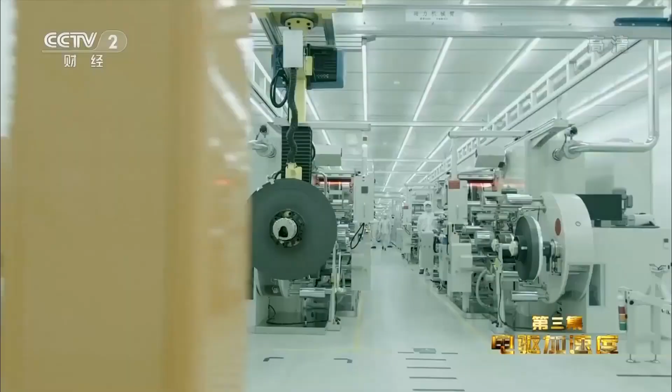Ningde in Fujian province is the world's largest electric car battery production base. A quarter of the world's electric vehicle batteries are produced here. An average of 1,000 batteries are rolled off the production line every minute.

Wang Shengwei is an electric vehicle power battery engineer. He and his team have been working towards a goal to increase the energy density of the battery. This is a key in determining the drive range of an electric vehicle.

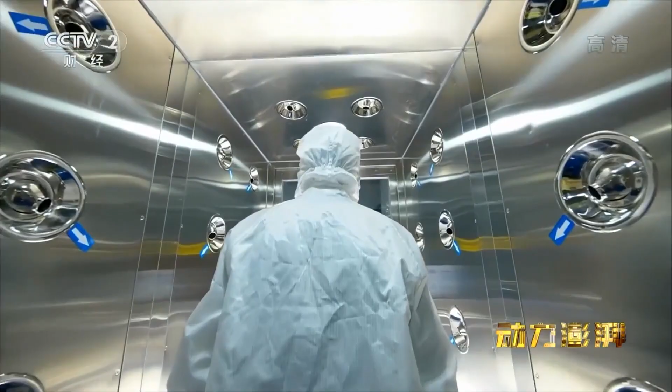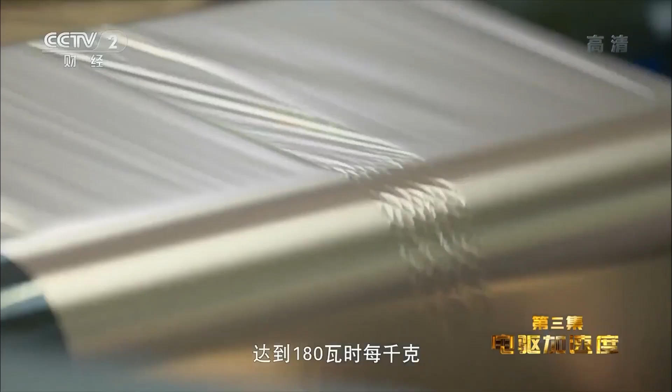In the past 10 years, Wang Shengwei's team has tripled the density of battery packs by developing chemical materials, reaching up to 180 watt-hour per kilogram, increasing the cruising range of electric cars from less than 200 kilometers to more than 700 kilometers. This is close to the limit of battery energy density without a major technological breakthrough in chemical materials.

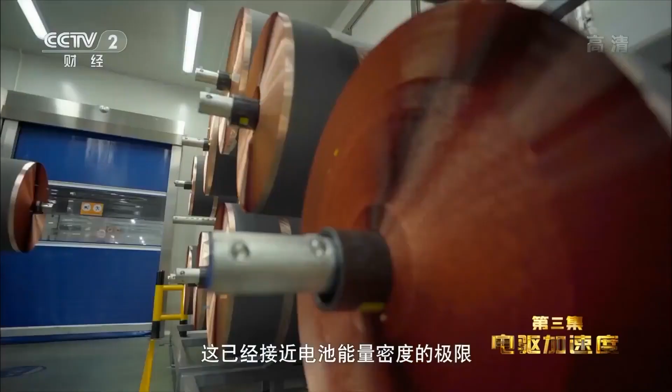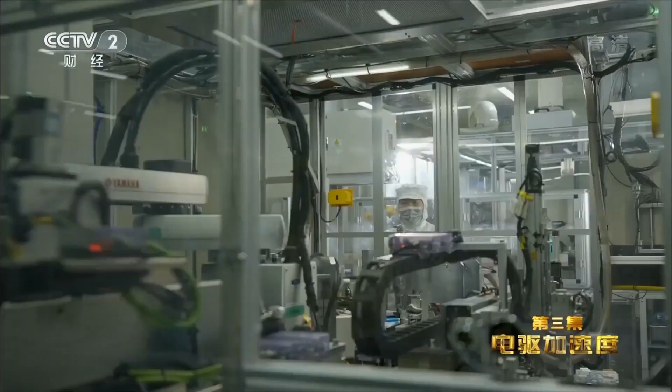However, Wang Shengwei's team did not stop here. This time they tried to break through structurally in design. Ordinary battery packs consist of modules. Each module contains about 10 cells. Wang Shengwei's plan is to remove the module structure and directly integrate the cells into the battery pack. The same battery pack space can fit more cells. As a result, the energy density can be increased by another 20%.

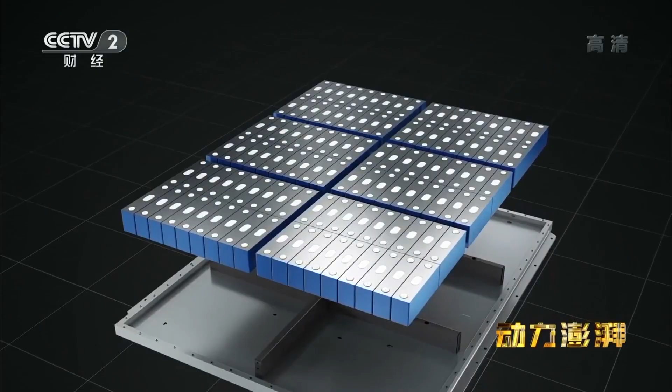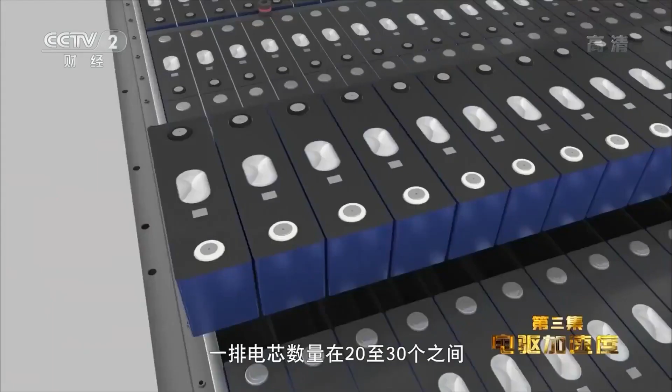However, there are more than 100 layers inside each cell. If the thickness deviation of each layer is 1 micron, the average thickness deviation of the cell will exceed 0.1 millimeters. If the number of cells in a row is between 20 and 30, there will be a cumulative deviation of 2 to 3 millimeters. This will prevent the battery pack from being assembled. Such structural changes impose an extremely high requirement on the consistency of the cells.

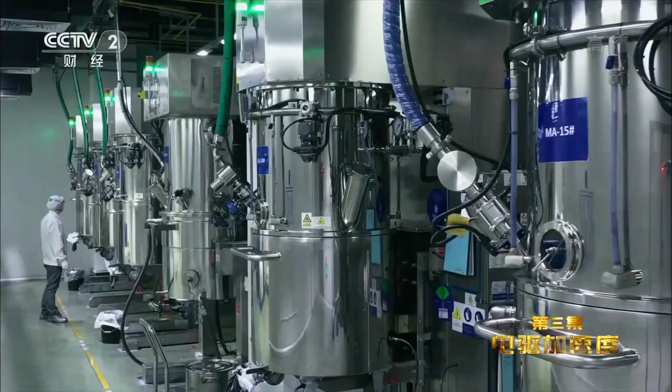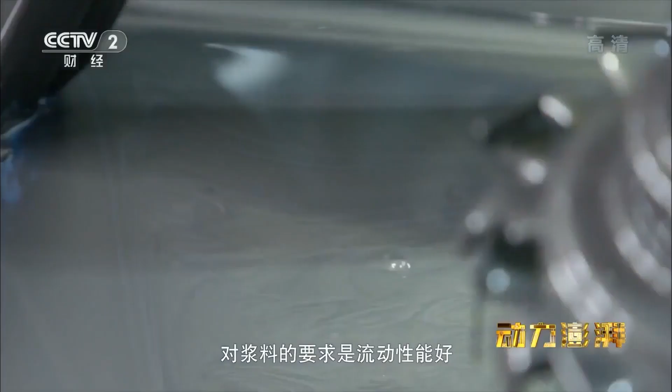When mass production products are near to being delivered, due to large amounts of cells, it is quite difficult to achieve a very good control on consistency of cell layer error. The key to controlling battery consistency lies in these slurries. Slurry is a paste that carries the positive and negative electrode materials of the cell. The requirements for the slurry are good flow performance, stable viscosity, and no solid sedimentation.

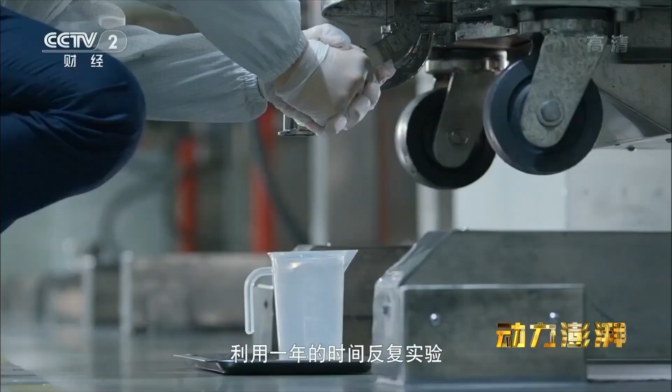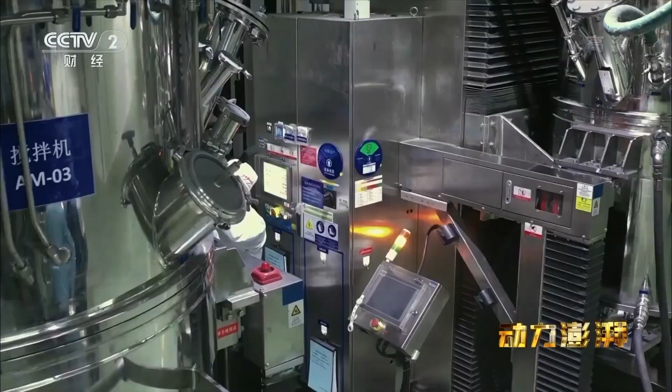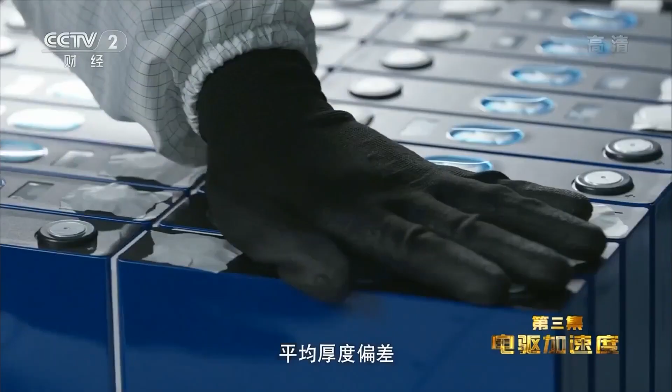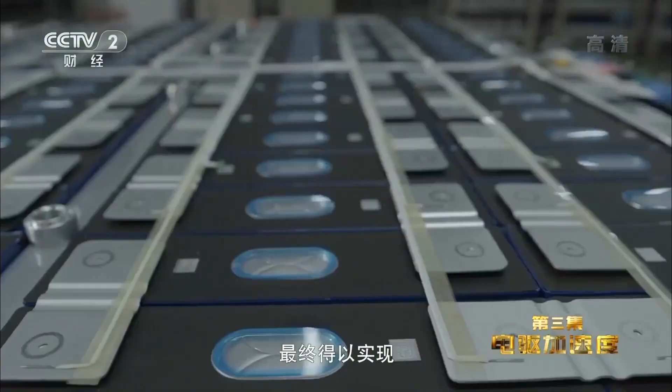Finally, they achieved a standard of overall quality improvement. The idea of directly integrating the cells into the battery pack was finally accomplished. The battery energy density is increased to 220 watt-hours per kilogram, which will increase the cruising range of electric vehicles to more than 1,000 kilometers. For Wang Shengwei, achieving this goal is far from enough.

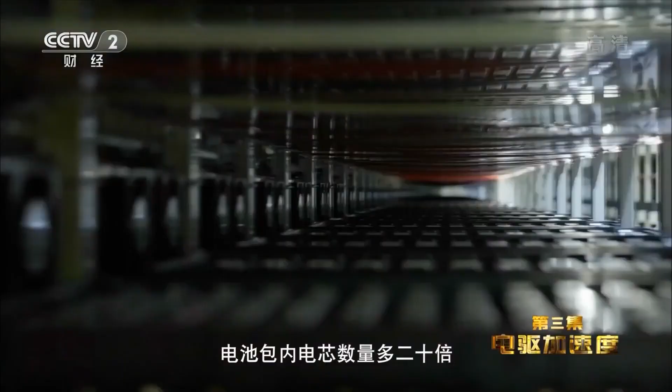15 years ago, he had researched and developed mobile phone batteries, which created a legend of 5-minute fast charging that lasted the phone for 2 hours talking. 5 years later, he changed his career to electric vehicle battery development, and he hopes to bring the convenience of fast charging to electric vehicle users. However, a single electric vehicle power battery is 10 times larger than a mobile phone battery and has 3 times longer life. There are 20 times more cells in the battery pack. Technical challenges are even greater.

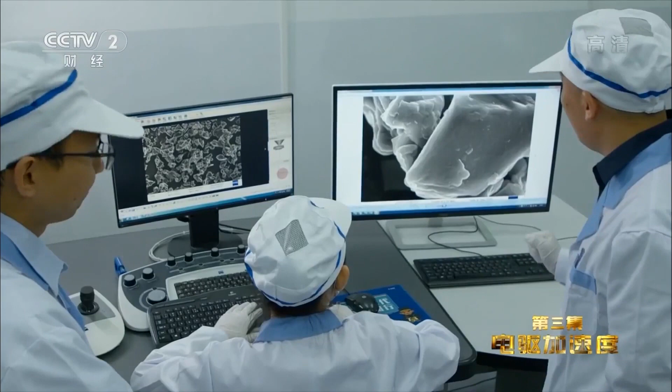From the user's point of view, people hope that the charging of a car can be just as quick as filling up a gas tank. This is ideal. Our current first step is to achieve a 15-minute fast charging. The team led by Wang Shengwei is racing against time. The super idea of fast charging depends on whether they can make improvements to the material structure that will speed up the lithium ions moving.

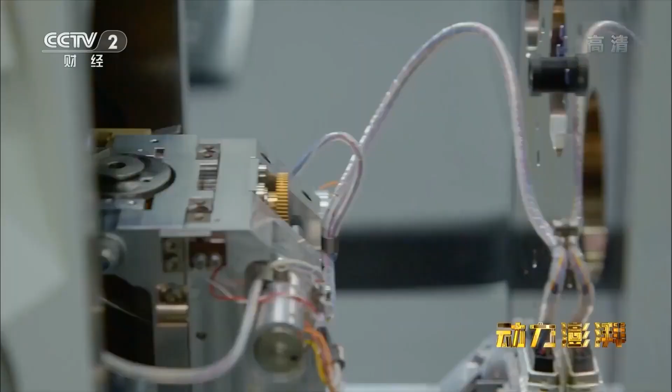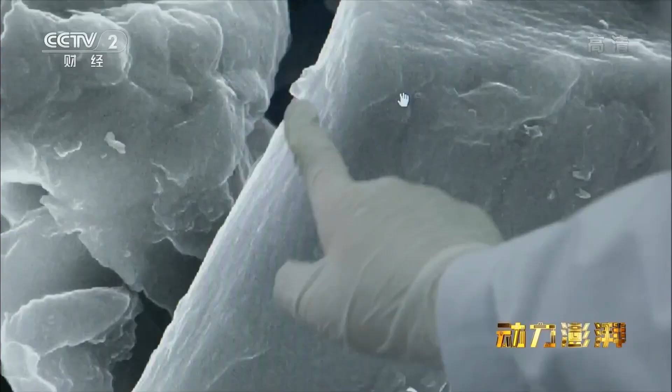Using synthetic graphite is common. We found it to have a downside. Its fast charging capability is relatively poor. But its advantage is that the energy density is relatively high. We transplanted the surface properties of natural graphite to the synthetic graphite. This achieves a faster charging, and also a longer life cycle.

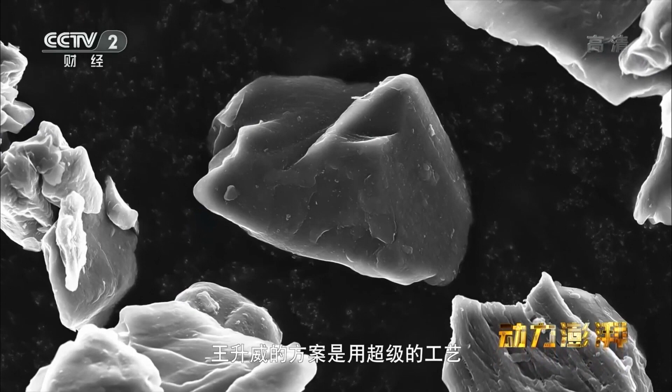Wang Shengwei's plan is to use a supercraft process to form fast ion rings on the surface of synthetic graphite, creating a microscopic industrial world. The fast ion ring greatly reduces the transfer resistance of charges and provides more transmission paths. Thus, they achieved a substantial increase in the rate of lithium-ion intercalation per unit time.

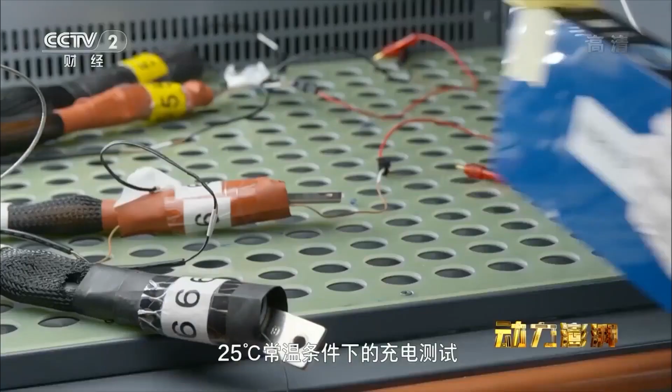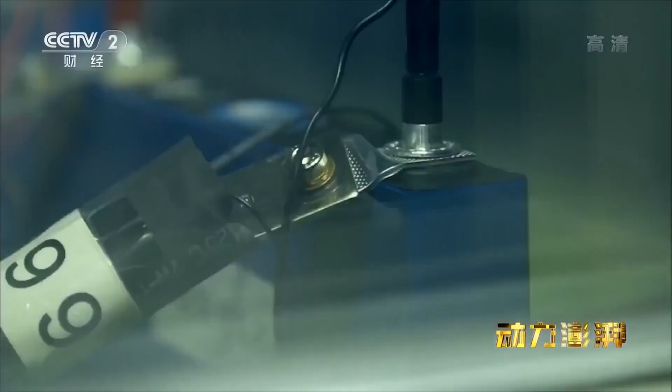Whether the battery made of the improved synthetic graphite can really enter mass production must undergo a charging test under normal temperature conditions of 25 degrees Celsius. The test begins. How much can the new solution shorten the charging time?

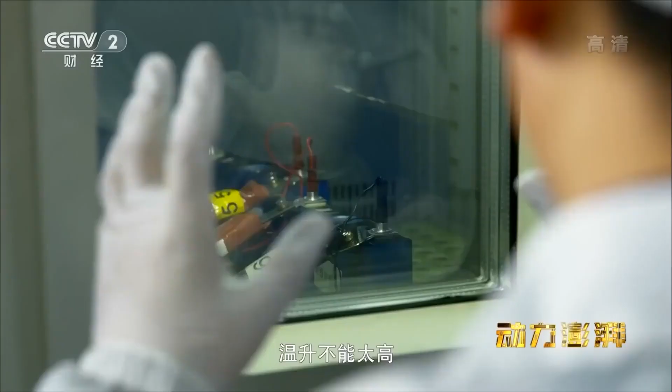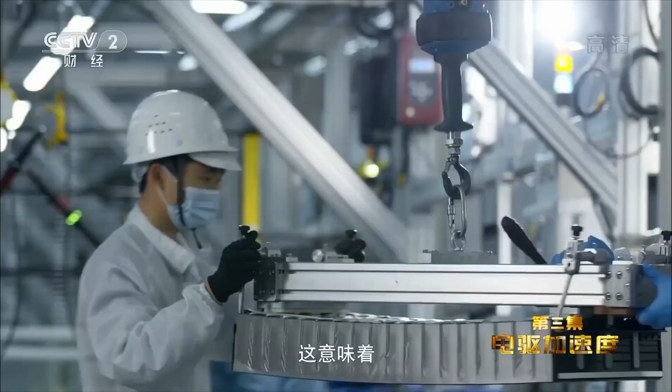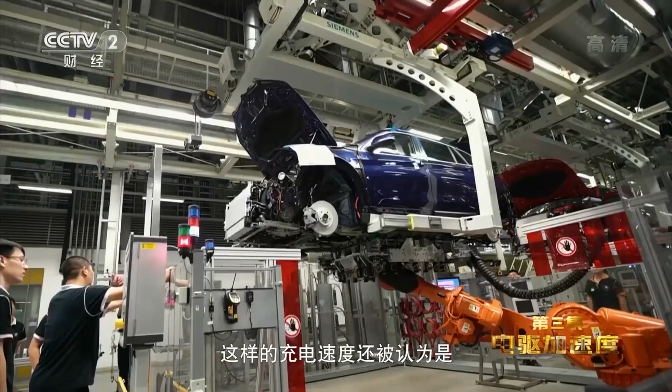In less than 12 minutes, the battery was 80% charged. At 100%, the test is complete. This means that a battery pack composed of such cells can provide a car with a driving range of 400 kilometers after just 15 minutes of charging. Only a year ago, such charging speeds were considered impossible. Such higher energy density and faster rechargeable batteries will make electric cars more convenient and efficient.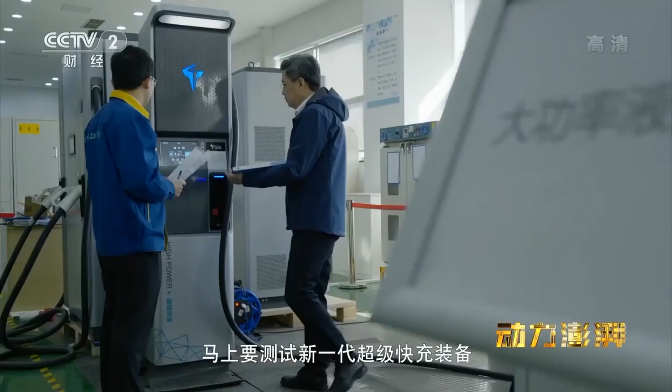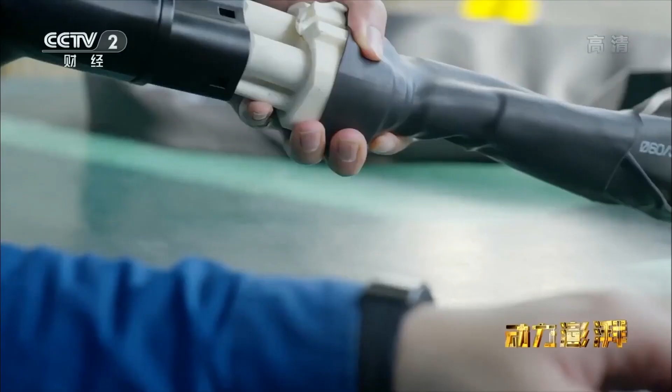In the field of charging equipment, Chinese engineers are also racing against time to improve technology and make charging faster. In Qingdao of Shandong, Yu Dexiang led the technical team to test a new generation of super-fast charging equipment. Are the load parameters set? Connect the load and prepare to charge. Start charging. As the voltage and current increase, the charging power begins to climb continuously. After 3 minutes, the charging power is close to the peak of 320 kilowatts.

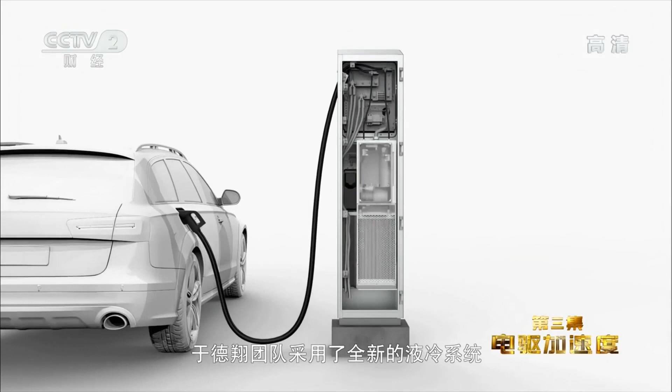In the design of this high-power charger, the Yu Dexiang team adopted a new liquid cooling system. Compared with air cooling, the cooling is more effective. Over time, the higher the temperature, the higher the circulation rate of its liquid cooling. It will take the heat out. This ensures the safety of charging.

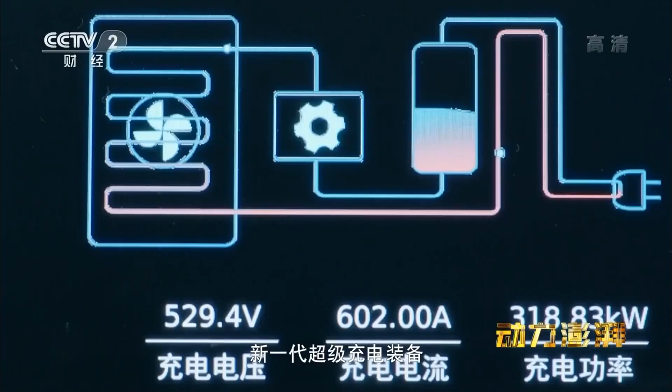The entire runtime is 20 minutes. The temperature rise is still within the normal range, and has tended to stabilize. The new generation of supercharging equipment successfully passed the test. This means that charging with new equipment for less than 10 minutes, an electric vehicle can travel for 400 kilometers. Such a charging speed is close to the experience of filling up a gas tank.

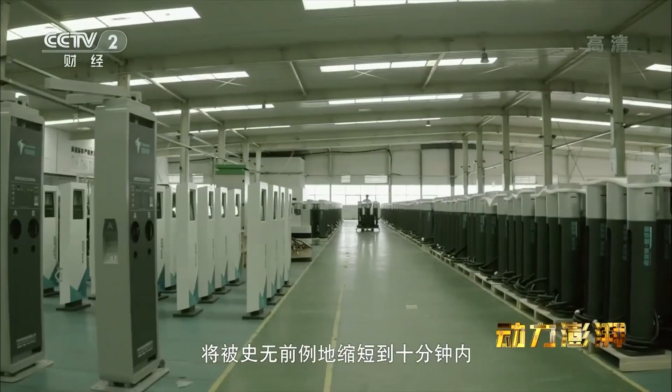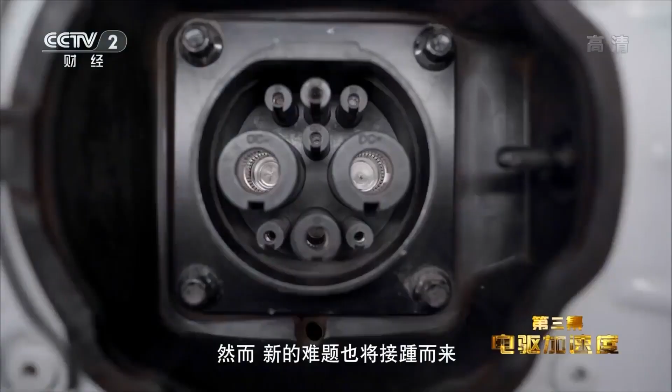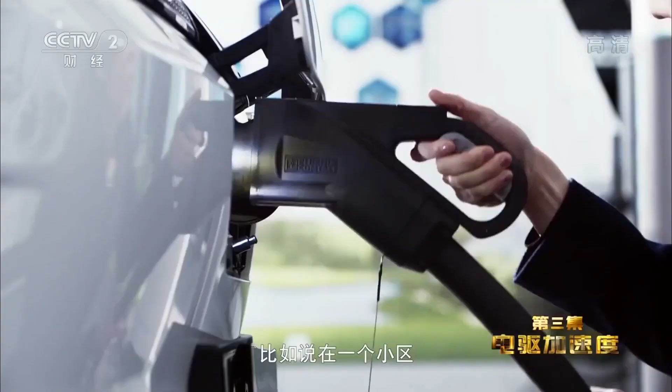The rapid upgrade of battery and charging technology will greatly accelerate the popularization of electric vehicles. However, a new challenge will follow. Random, disordered charging at charging poles cannot meet the needs of large-scale electric vehicle development. For example, if 100 vehicles return to a residential area at roughly the same time and use charging poles for disorderly charging, the electrical system could be overloaded.

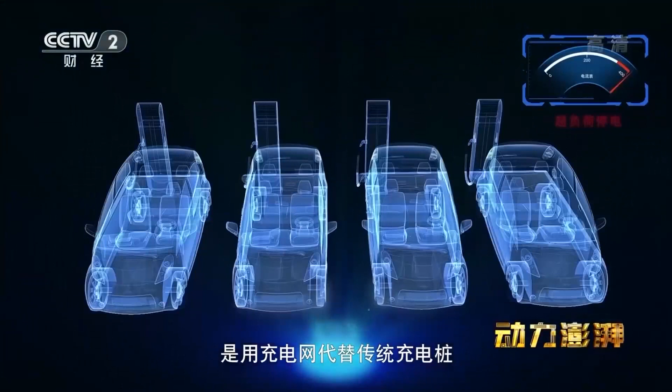Yu Dexiang's team's plan is to replace traditional charging poles with charging networks, so as to achieve orderly charging. All charging terminals in a planned area are connected through energy management devices to the utility plant. The system manages the charging sequence of the cars according to the real-time electricity load of the plant, in order to avoid the impact of concentrated charging on the power grid.

The charging pole actually uses a physical plug to charge the battery of a car. As it's plugged in, it is being charged. But on the charging network, when it is actually being charged is uncertain. We will charge and discharge a car in an orderly manner according to the needs of the tenants, as well as how much remaining battery power the car has, and the surplus power in the grid at any given moment of time.

In the past 6 years, Yu Dexiang's team has replicated and promoted this plan, and has built a map covering more than 350 cities across the country: a charging network with more than 332,000 charging terminals.

Not only that, in this new industrial Internet of data link and energy interaction, they have also added real-time monitoring and big data analysis technology to conduct a full examination of each battery during the charging process, with the collected charging data pushed to the central platform in real time and compared with historical big data for analysis and comparison. If a safety hazard is found, the charging is stopped immediately. This ensures charging safety. This is considered one of the ideal charging solutions to meet the large-scale use of electric vehicles in the future.

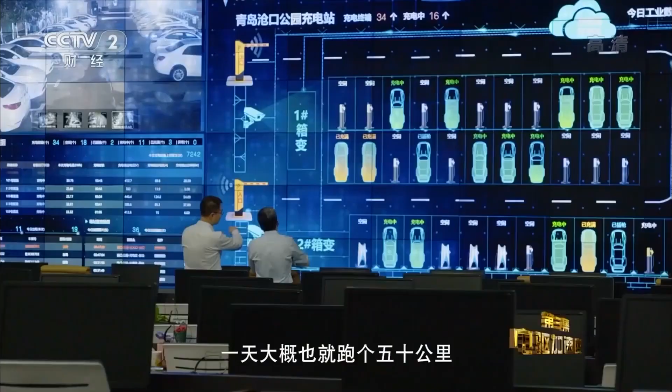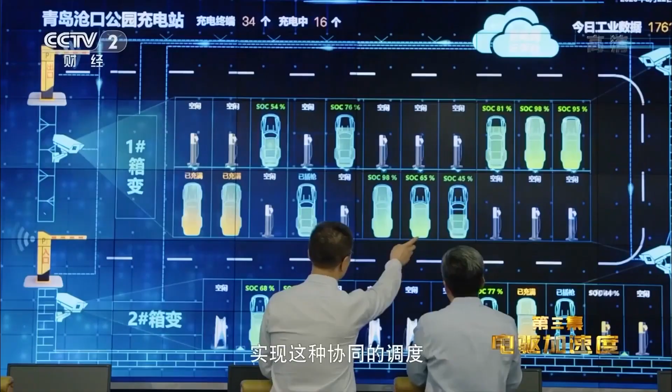The dream of Yu Dexiang is to provide more comprehensive energy-saving solutions for owners of electric vehicles. Each electric car only needs about 50 to 180 kilowatt-hours of electricity. Running for 50 kilometers only needs 10 kilowatt-hours of electricity. 70% of electricity is unused in most cases. Precisely, we can use that 70% of the electricity to achieve coordinated dispatch with the power grid and between energy sources. That helps the power grid balance distribution, to ease the peak hour and fill the off-peak hour, making the power grid far safer.

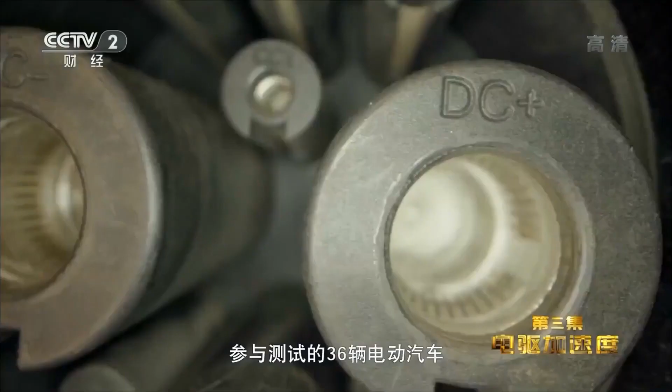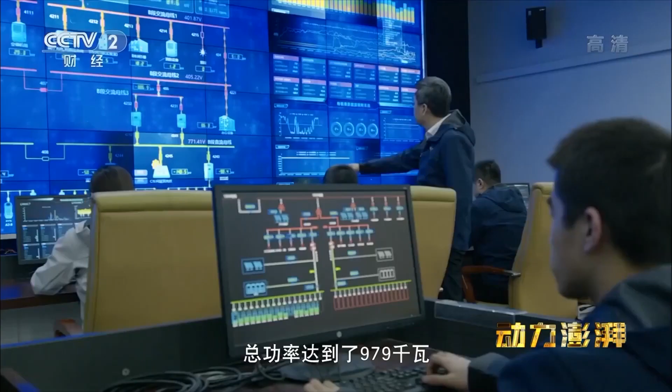Can Yu Dexiang's dream come true? It's crucial that they perform a test today. The 36 electric vehicles and charging terminals participating in the test have all been upgraded with V2G technology. This means that these electric vehicles can either be charged through a charging device or discharged in reverse, releasing electricity back to the power grid, which we may call an electricity bank. The charging of 36 vehicles is now started. The test begins. The total power reached 979 kilowatts.

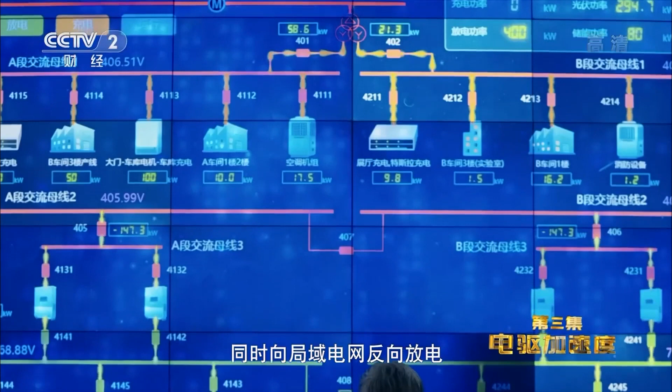Yu Dexiang's goal today is to have 36 electric vehicles that originally only have charging needs discharge in reverse to the local grid at the same time. This is a very bold attempt. Immediately go to discharge mode. A successful test means EV owners can charge the car when the grid is plentiful, and discharge to give electricity back when the grid is strained. While enjoying the convenience of travel, you can also enjoy the benefits of energy sharing.

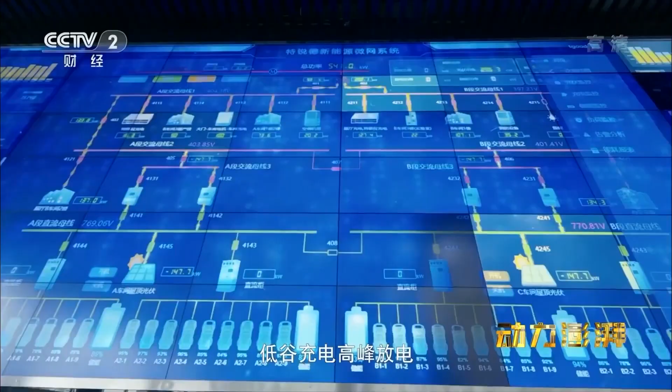As an ordinary user, driving a gasoline car costs money. But driving an electric car has the potential to make money. Fully charging your car at home may cost you 30 cents. During peak hours, electricity prices may be as high as 1 yuan and 20 cents. You can discharge the car's electricity and sell it to the grid for profit. Not only that, but this technology also links the charging grid to the energy grid. If there are 3.6 million vehicles in the country participating in off-peak hour charging, it will be a huge contribution to balancing the power grid and ensuring the safety of the power grid.

At this time, 36 electric vehicles continued to discharge, which has reduced the instantaneous power load from 538 kilowatts to 89 kilowatts on the grid. Nearly 80% of the load power is provided by these electric vehicle discharges.

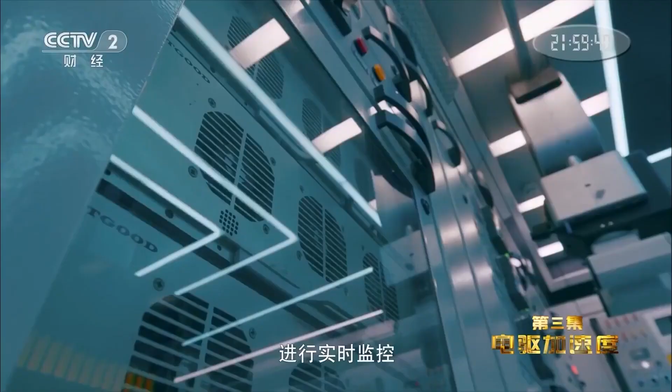The AI camera uses technologies such as image recognition and infrared temperature measurement to monitor the equipment participating in the test in real time. Now, the discharge power has reached 401 kilowatts. Peak shaving can account for more than 30% of the total load. The test passed.

In Yu Dexiang's mind, the future scene of the electric age is gradually approaching us. In the near future, the large-scale development of electric vehicles will form a huge mobile energy storage network through the link of the charging network. China is accelerating its efforts to achieve carbon neutrality. However, this will only be possible with robust and smart super grids providing power delivery.

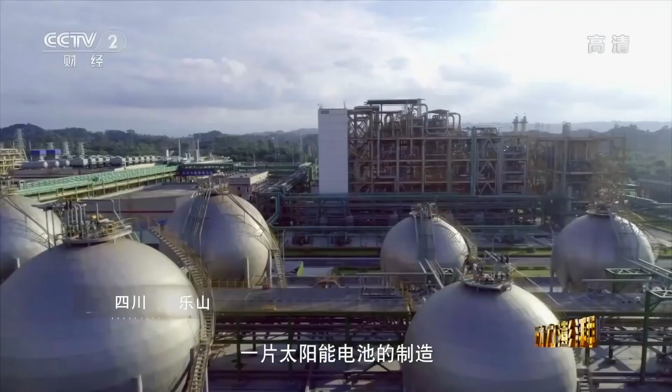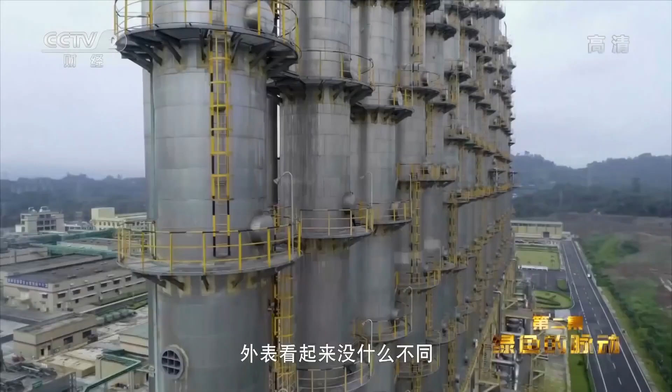The manufacture of a single solar cell can be traced back here. The pipes that the workers are overhauling look no different from the outside, but there are violent reactions on the inside. The silicon powder extracted from the ore is chemically processed to obtain trichlorosilane. Workers are purifying it.

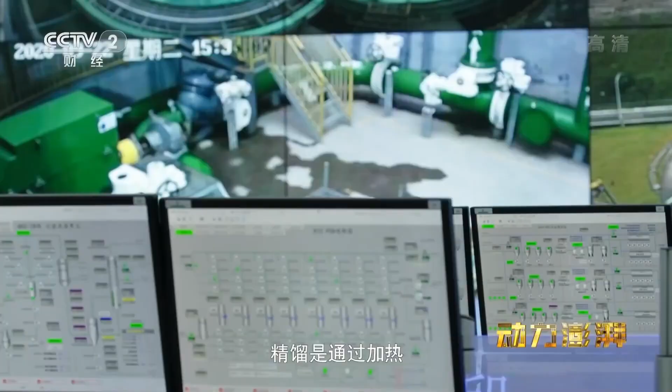Rectification is to separate impurities in trichlorosilane by heating according to different boiling points. It's all about making higher purity silicon, because silicon is the most important material for solar panels. Luo Zhouyu, a senior technician, uses purified trichlorosilane to produce silicon. The purity of silicon directly affects the power generation efficiency of the panel.

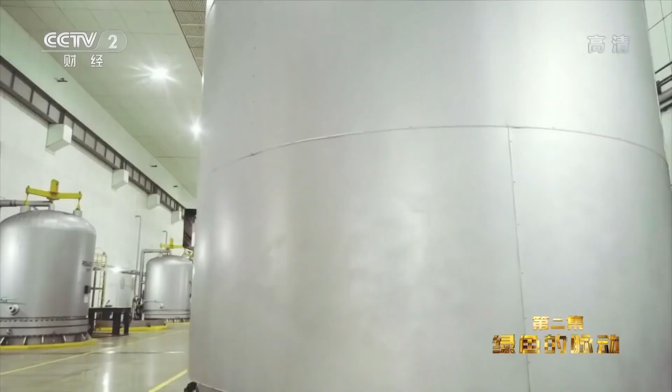The higher the purity of silicon, the higher the requirements for air cleanliness in the process. Therefore, before entering the reduction building, workers must remove the dust adhering to the clothes through an air shower system. In the 2,500 square meter reduction building, 27 reduction furnaces are opened every 4 hours. Opening the furnace means the manufacture of millions of dollars worth of high-purity silicon is complete.

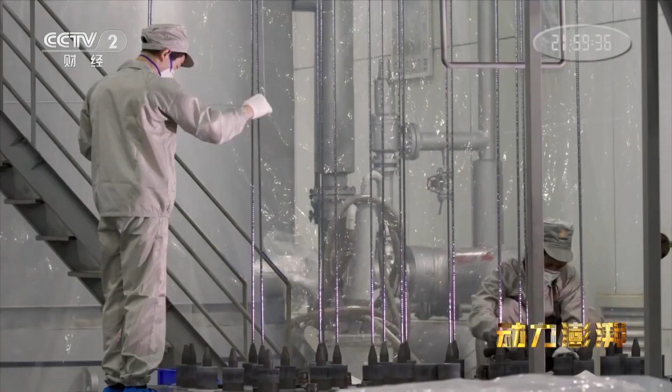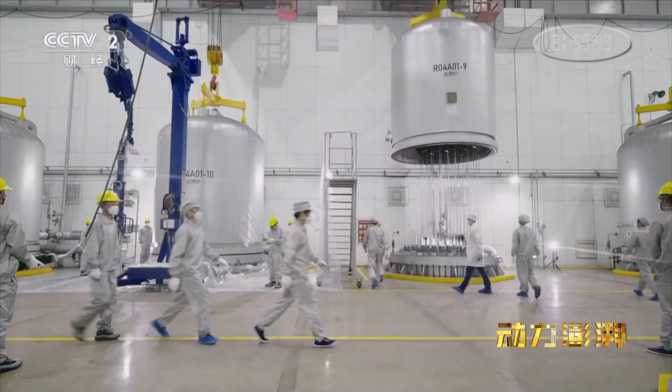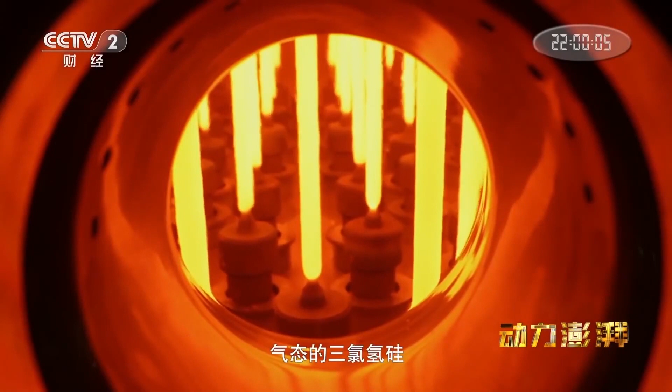Silicon cores with a diameter of 10 mm were sequentially mounted on electrodes at the bottom of the furnace. The reacted high-purity silicon will grow on its outer surface. After the furnace is closed, energized and heated, the temperature inside the furnace is stable between 1000 and 1080 degrees Celsius. Gaseous trichlorosilane and high-purity hydrogen are injected into the furnace. The diameter of the silicon rod increases by 1.7 mm every hour. The entire reaction process takes more than 100 hours. At this time, the silicon core of another furnace has been transformed.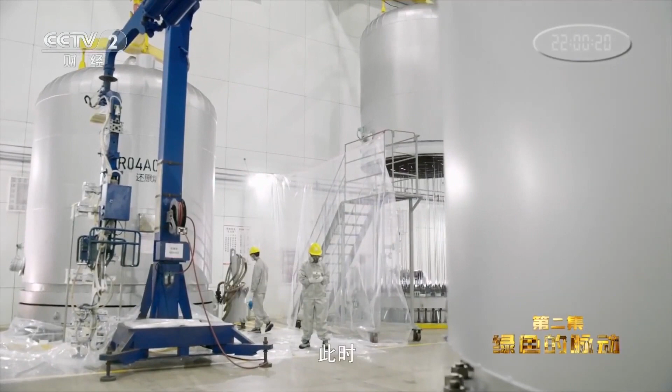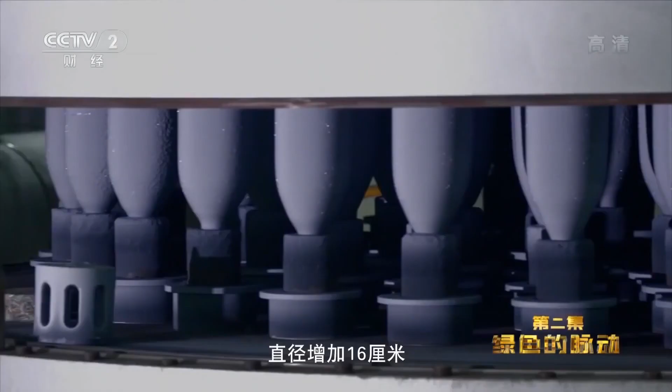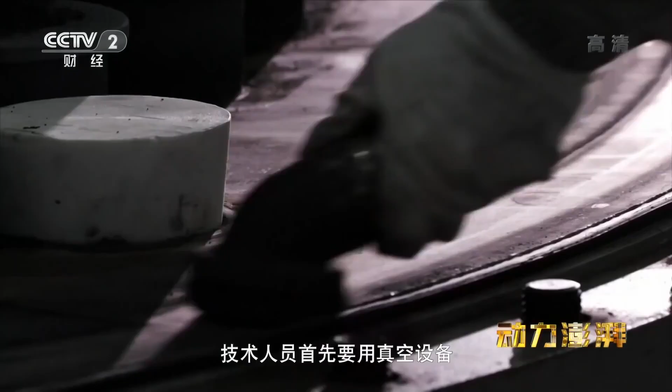When the furnace drum is lifted, the diameter of the silicon rod has increased by 16 centimeters, the weight has increased by 125 kilograms, and the value has increased by 100 times. In order to prevent pollution, technicians first use vacuum equipment to remove the impurities on the bottom of the reduction furnace. Next, the workers have to cooperate with the robot arms to remove the silicon holder as soon as possible.

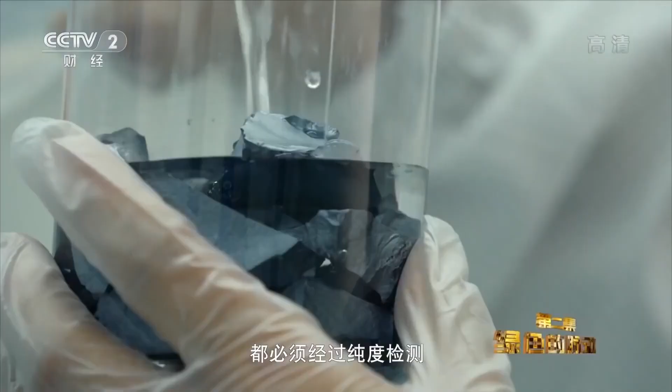The silicon rods from each furnace must be tested for purity. In the testing center, the number of dust particles with extremely small particle size is controlled within 1,000 particles per cubic meter. Higher cleanliness ensures accurate test results. Well, this batch is of good quality. The purity of this batch is as high as 11 nines. The higher the purity of the silicon material, the higher the photoelectric conversion efficiency of the cell.

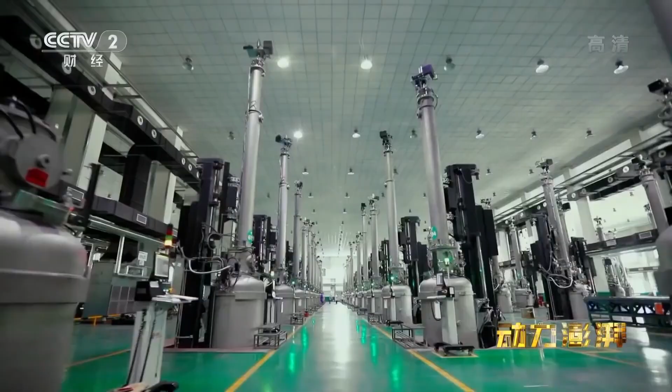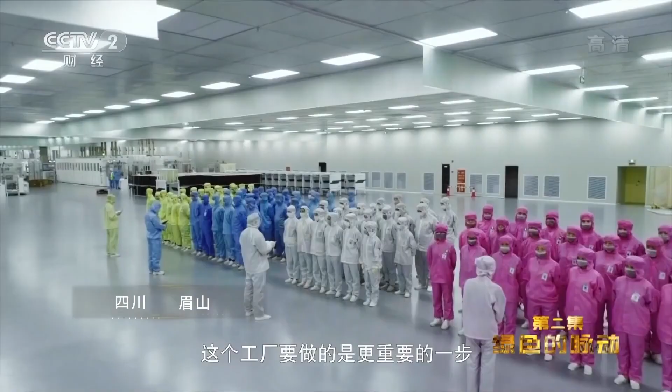However, from silicon material to a photovoltaic cell that can actually be used to generate electricity, it must undergo many manufacturing processes. The processes of single crystal silicon rod pulling and silicon wafer cutting are often carried out in different factories. What this factory has to do is a more important step, which will turn silicon wafers into cells.

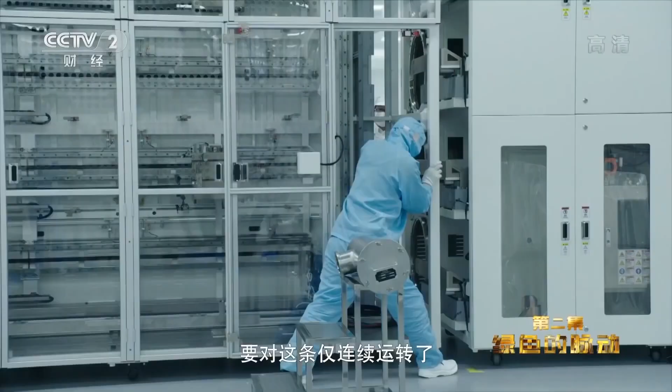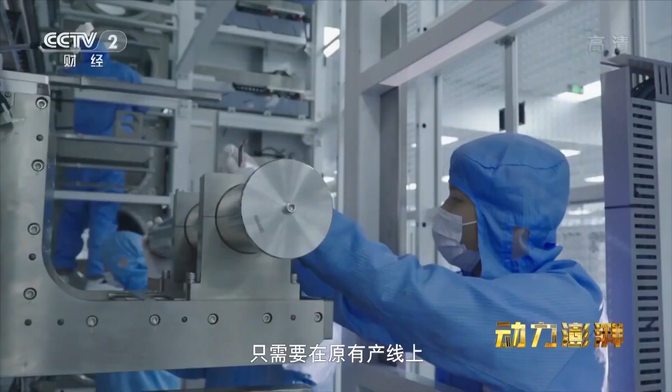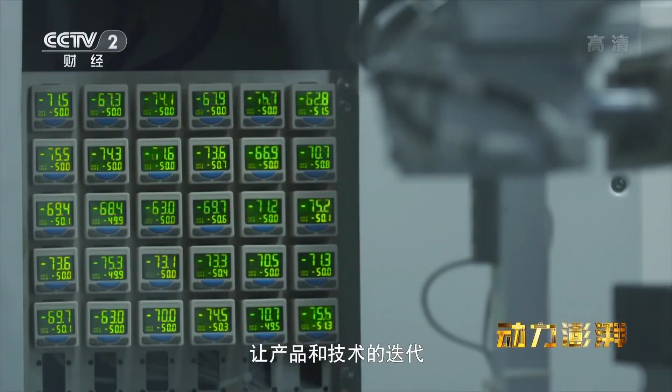Today, engineer Wang Shoupeng is going to upgrade the production line that has been running continuously for only 130 days. It only needs to add 3 more processes to the original production line, which will increase the photoelectric conversion efficiency of the cells by another 1.5%. In the photovoltaic cell industry, jogging is a step backwards. You have to run. The ultimate pursuit of efficiency results in the iteration of products and technologies becoming very fast. The 60 technicians in the night shift had to cooperate with him to complete the final equipment testing and adjusting.

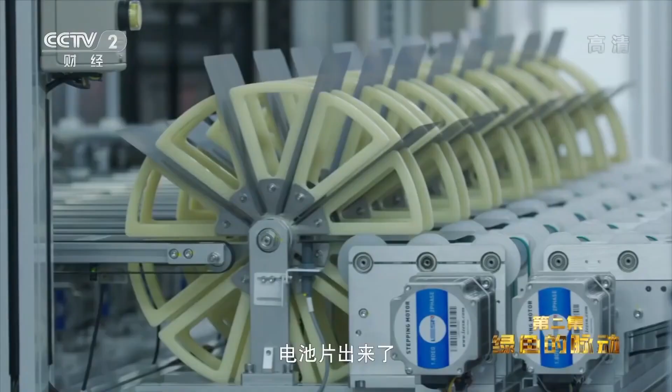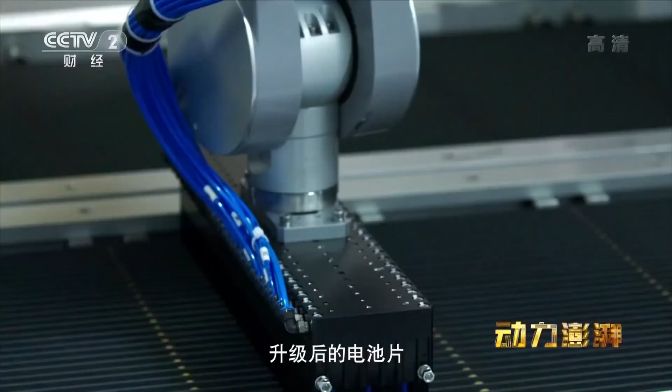The new production line is up and running. Wang Shoupeng and his colleagues waited anxiously. The first batch of brand new cells just came out. The new technology has been applied. The coating material on the reverse side of the cell separates the silver electrode of the cell from the silicon sheet. Then, the photoelectric conversion efficiency of the cell is further improved. The upgraded cells have a photoelectric conversion efficiency of up to 24%. This is a new world record.

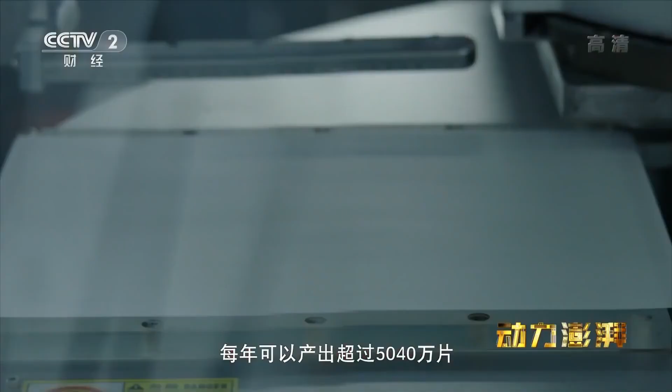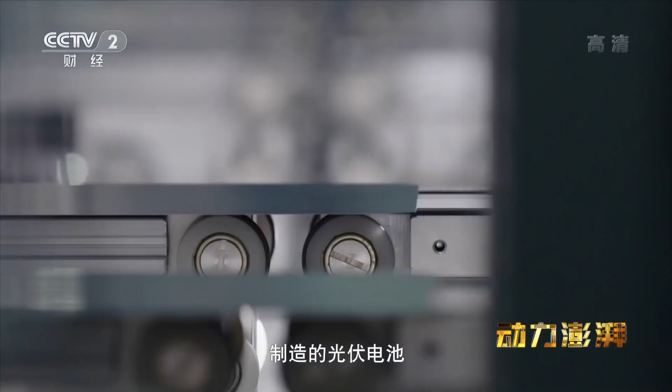This new production line can produce more than 50.4 million cells per year. If all cells are installed, they can generate about 450 million kilowatt-hours of electricity every year. Just over a decade ago, China was unable to produce high-purity polysilicon on its own. Manufactured photovoltaic cells were also mainly exported for use abroad.

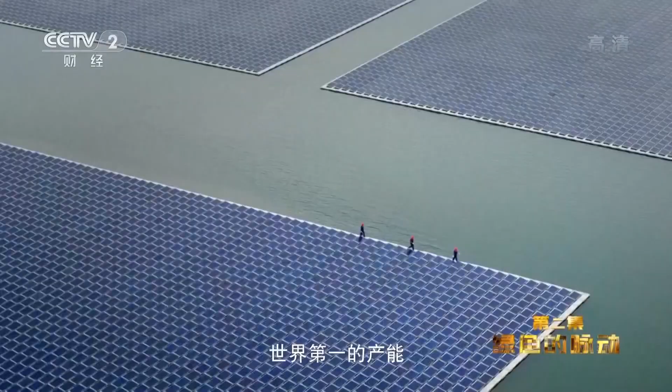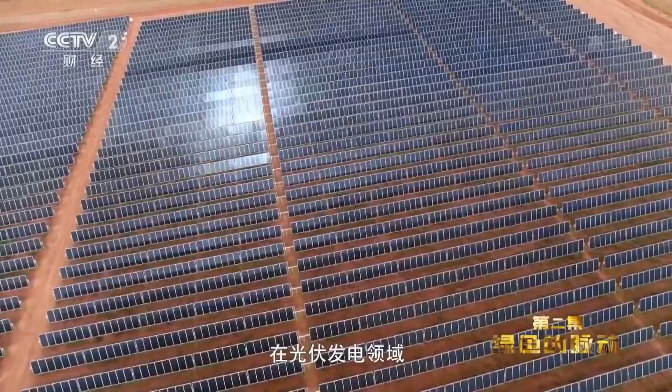Today, a complete industrial chain allows China to have the world's largest production capacity of photovoltaic cells. Not only that, today China's total installed photovoltaic capacity ranks first in the world. Power generation ranks number one in the world. In the field of photovoltaic power generation, China once again leads the world.